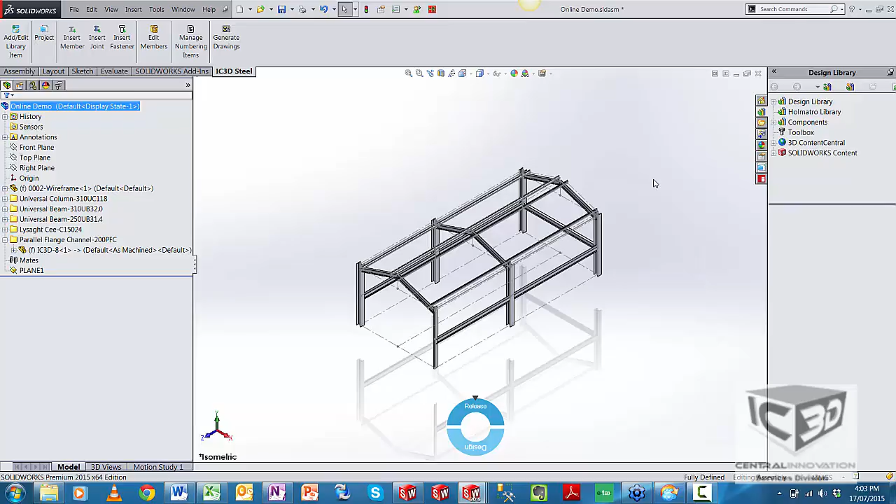Hi everyone, Prasad Bansule here from IC3D, wanting to give you a bit of an update on another new feature added to IC3D Steel, which is the inclusion of the Heavy Engineering and Research Association, or the HERA joints, which are quite widely used in New Zealand for the structural construction industry. So these structural connections are now available in IC3D Steel. So just wanting to show you a few examples of where they're available and then how they can be utilized.

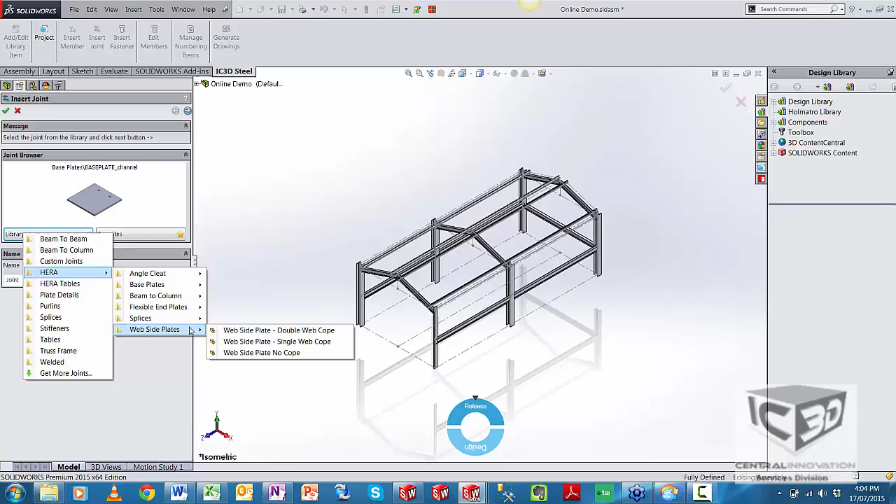So if we go over here to insert joint, under the library and getting more joints there, you'll see now, in addition to the Australian standard, we've got the HERA joints available as well for download. I've got them downloaded here, and you can see that they appear here under the library. And there's quite a few of them. There are angle cleats, base plates, some moment end plates and stiffeners, flexible end plates, lots of splices there, and some web plates as well. So I just want to show a few examples of the different ones that are available.

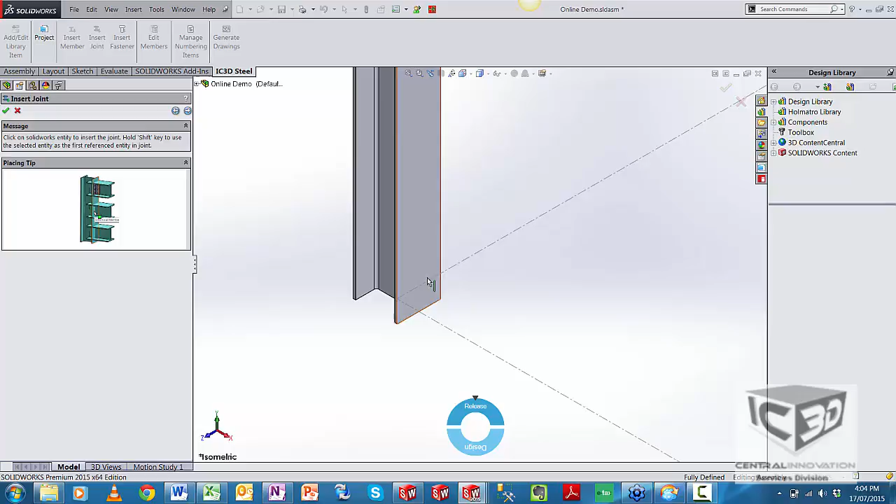We'll just start off with the simple base plate. You'll notice that there are different base plates for different structural member profiles as well. This is something that's defined in the HERA standard, so we've supported that as well. So I'll just choose a base plate here for this column. We'll just select it, click next. So it's asking for a reference point and just the column body itself.

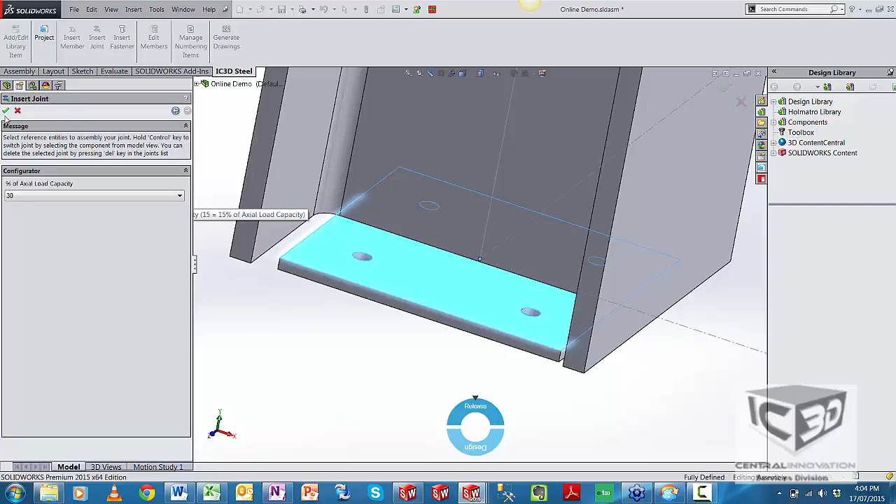Click next. So we've got an option here to select the percentage of axial load capacity. So each column can support some particular axial load, and we can, as the designer, choose a percentage of that, and the base plate will be sized appropriately. So a higher percentage means that it can support a higher load, and the base plate should therefore be a little bit wider and thicker, and so on. So if we just click OK there,

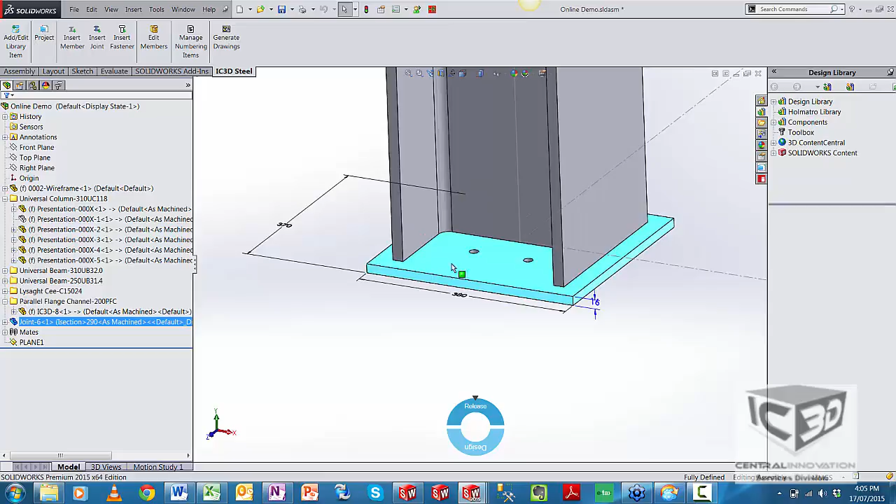and you can see that the base plate is resized. It's got its thickness there and it's positioned into place. As well as that, we've got the holes inserted there as well. And all of this sort of information is just coming from tables that are there in the background. And you can view the tables, you can edit them, you can basically change the values to whatever you like. So if you don't think that this is wide enough, or you want the holes to be spaced out a lot more, then you've got that option to go in, change those values, and the joints will be updated there as well.

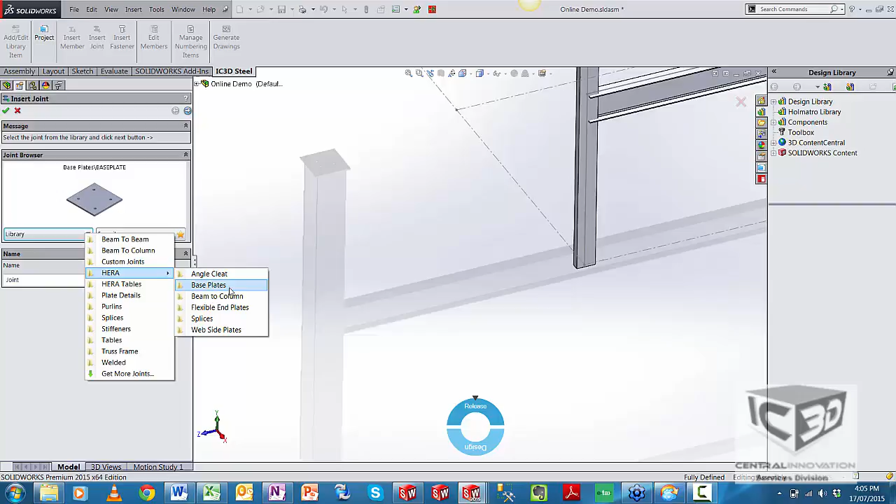Let's just take a look at another example, just a parallel flange channel there, so inserting a slightly different base plate design for that. So we'll just find that in the library. There it is there, one for a channel. Okay, again, just select where we would like it to go. So a couple of selections here. Again, it's asking us for the back face of the channel, and again we've just got these handy tips for you there as to what you need to select. So just select the back face of the channel, select the reference point.

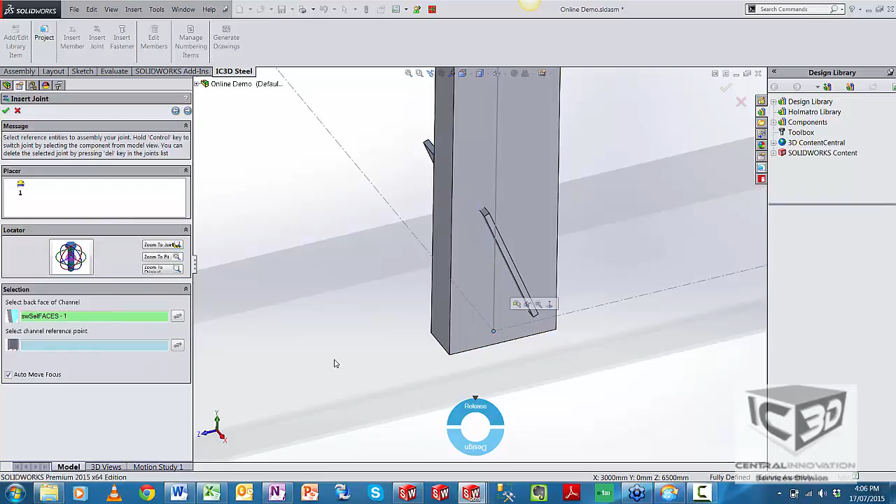Okay, so it's positioned itself there. Same thing again, choosing the axial load capacity, say 30%. Click OK and just do a quick rebuild to get it into place, and you can see how it sized itself and the holes are spaced there appropriately.

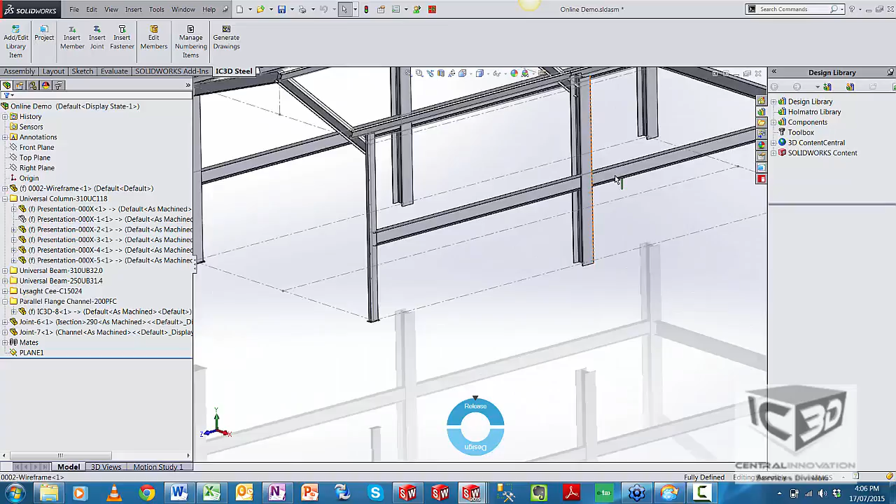Alright, a couple more examples there. Maybe we'll look at some angle cleats. So we'll just insert some here. So just go to a simple single with no cope. Again, we've got coping options there as well.

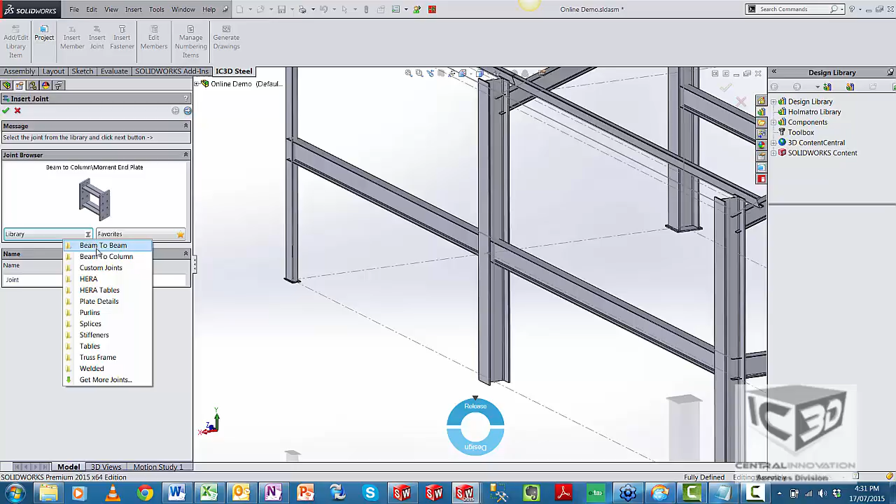Okay, let's take a look at another example. We'll just insert some angle cleats as well. So we'll just go over here, insert joint, find them in the library, angle cleat, and we'll just go with a simple no cope, for example.

So you can see here that, first of all, we've got double and single angle cleats, but we've also accounted for the different cope cases that are defined in the HERA standard as well. So I'll just go for a single no cope. Just go next, and we'll just go ahead and click where we want it to go.

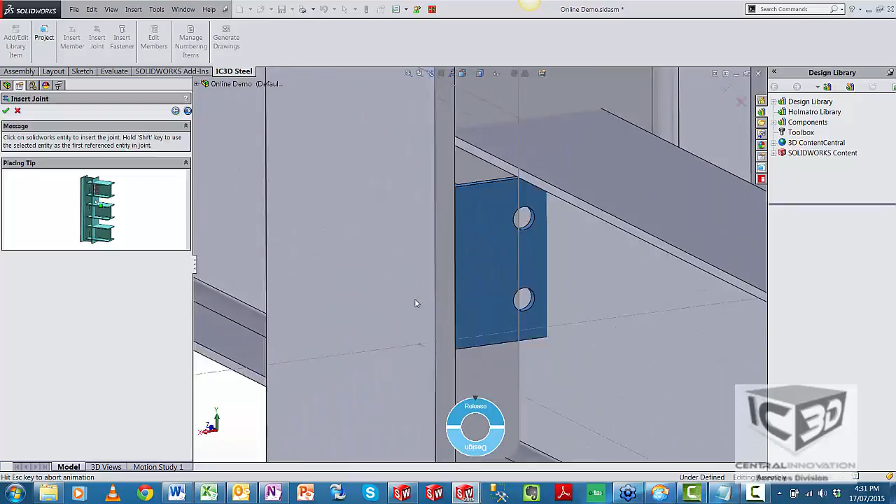Choose the options, so a few more selections here, 3 in all, so it's asking us for a column face, then the beam body, and then just the top face of the beam to define a vertical position. So define that. And this time we've got to select what percentage of shear load capacity. So what shear load and what percentage of that shear load can the supporting beam handle there. So we'll just go with, say, the default 30%. Click OK.

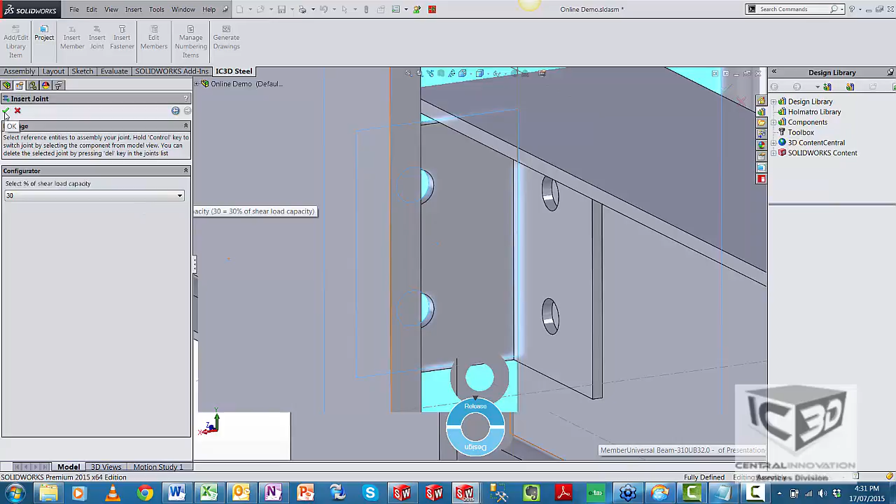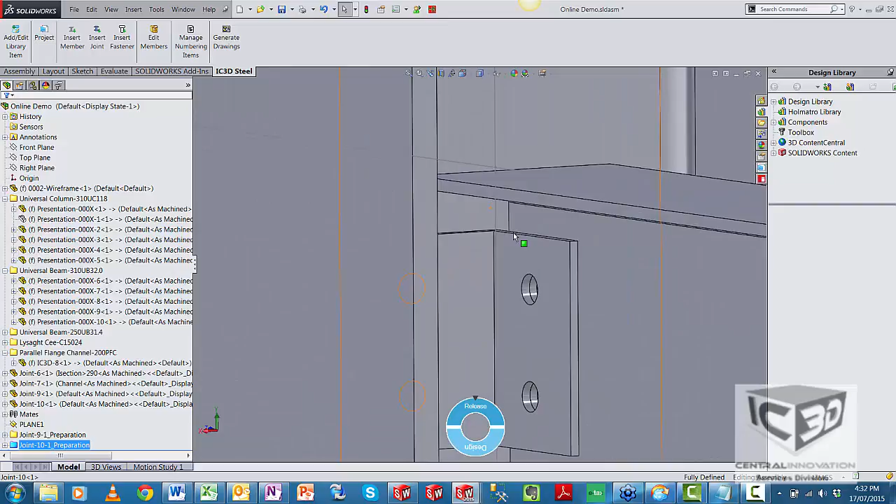And you can see how it's moved itself into place, and we've got the corresponding number of holes cut on both the beam and the column there. And not only that, you'll see that the beam itself is cut back from the column as it should be, again all defined by the standard.

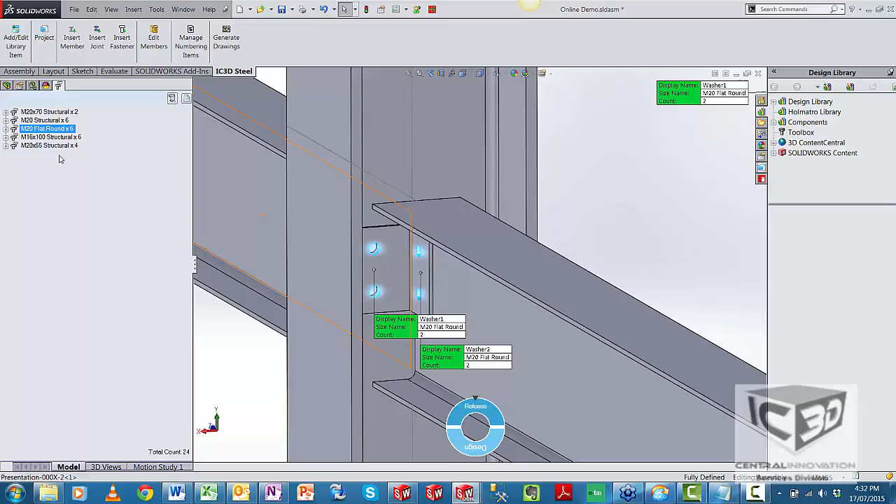And if we just again go to our Fasteners Explorer over here, so the angle cleat, it has not only the bolts, but it's also got some nuts, and it's got some washers there as well. And if we export our bolt list, we can very quickly take a look at what we've got there. So we've got some bolts, we've got some washers and some nuts that are being inserted there as well, and we could export that accurate bolt list out as well.

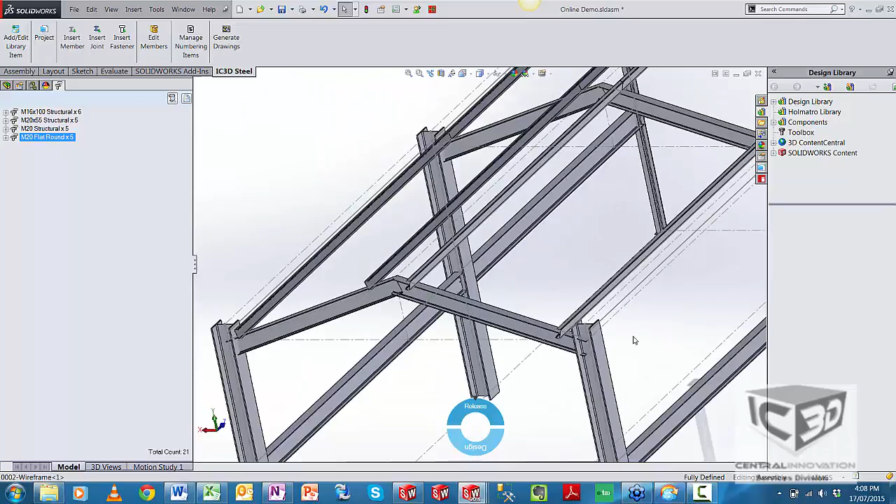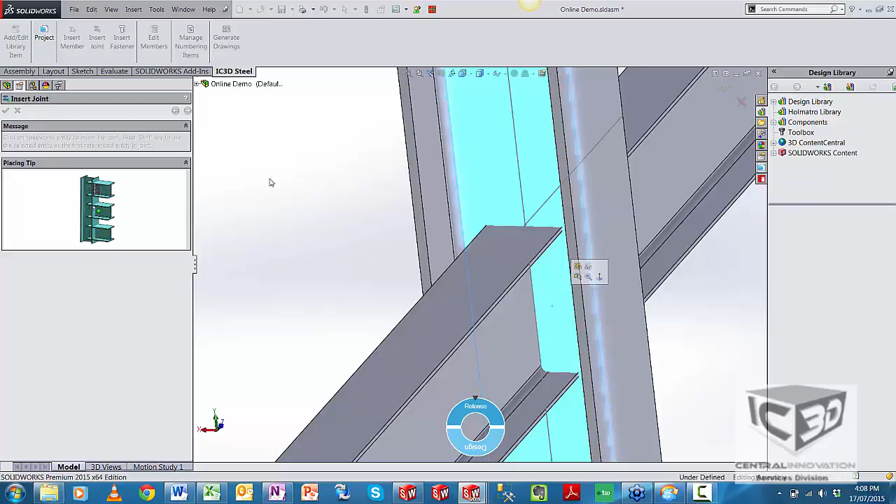A few more examples. Let's take a look at a flexible end plate. So again, we'll just go down to end plate there, and we'll just choose one with no cope. Select where we would like it to go. Choose the appropriate face, so that's where we need it to go. The beam body, and just the top face of the beam there as well. Okay, click next. Same sort of thing in terms of the shear load capacity. Let's just try 40.

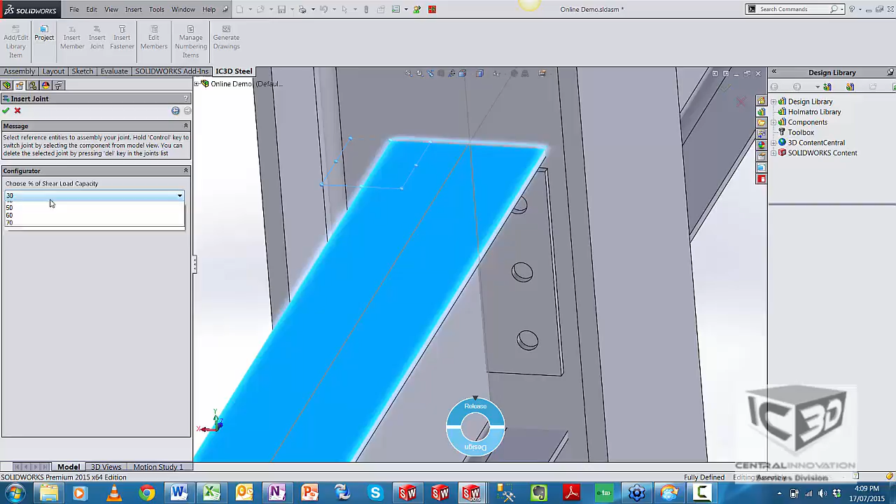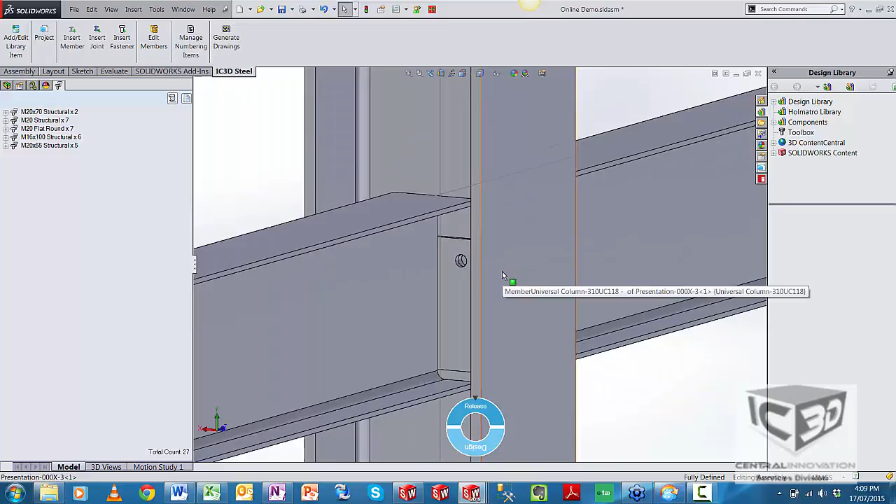And you can see that it's placed itself into position. You can see that the beam is cut back there. If I just hide the column for a moment, so you can see it's cut back there, and the holes have been cut through the column there as well.

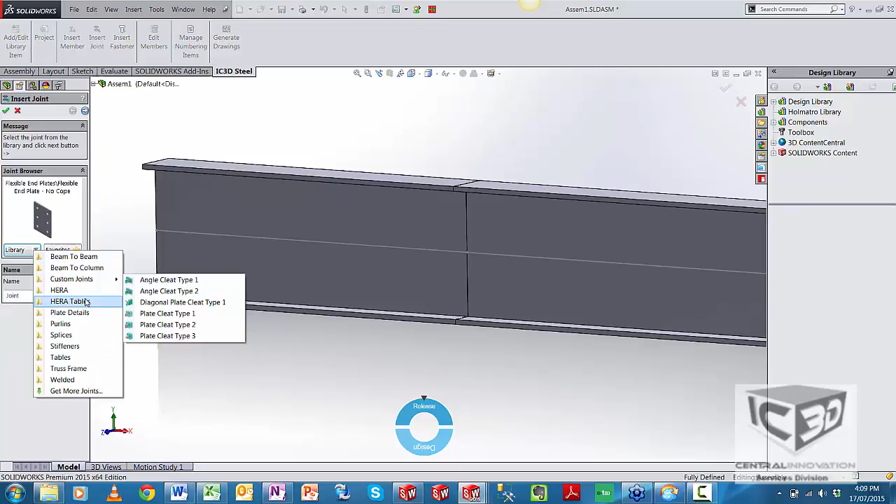Alright, let's take a look at a slightly more complex one. I'll just go to this assembly here. So when we've got two beams together, we might want to splice them apart. So we've got a few splices available in the HERA library as well. So a few different combinations. We've got beam splices, column splices, what's known as a bolted welded beam splice, and moment end plate splice that can come either extended or just flush to the beams, or even with gussets as well. So let's maybe try that one there.

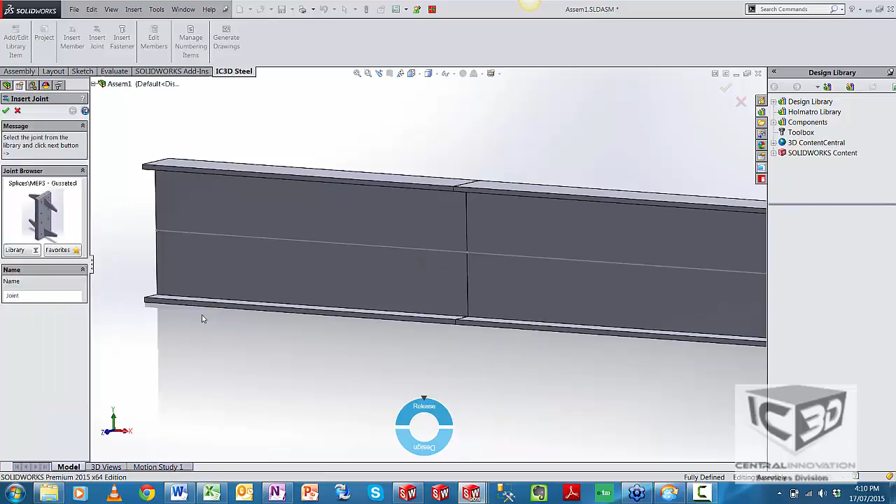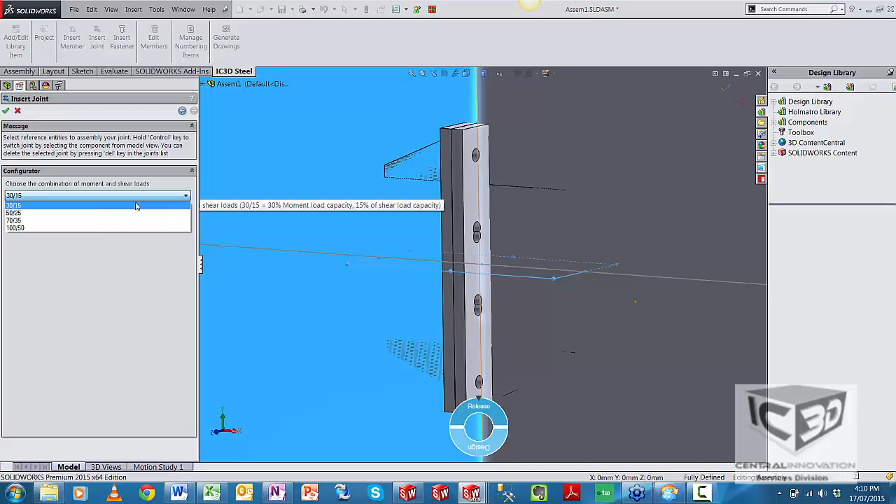Okay, so we'll just select where we would like it to go, and we've got a few selections to make there. So it's asking us for a beam body to align, and just select the beam body on the other side, and just a splice point to position itself along the two beams. Go ahead and select those. This time we have a combination of what are known as moment and shear loads. So you might have again just your percentage there, and there's a little tooltip telling you what you need to select. So we'll just select one of those options, click OK.

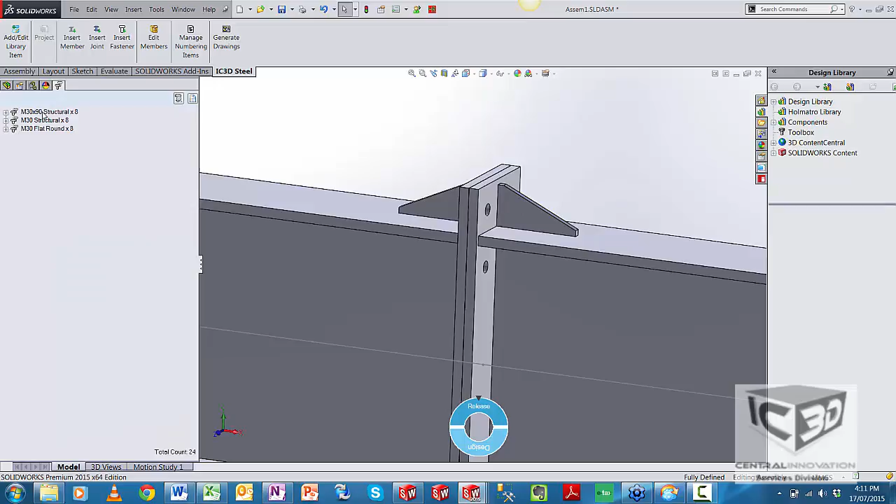And you'll see how it puts itself into place. So the plates are automatically widened, the holes are cut through, and the gussets are appropriately sized as well. And we can go again to the fasteners, and you can see we've got a total of 8 holes there. So we've got 8 bolts, 8 washers, and 8 nuts. And again, this can be completely customized to whatever fastener arrangements you might want.

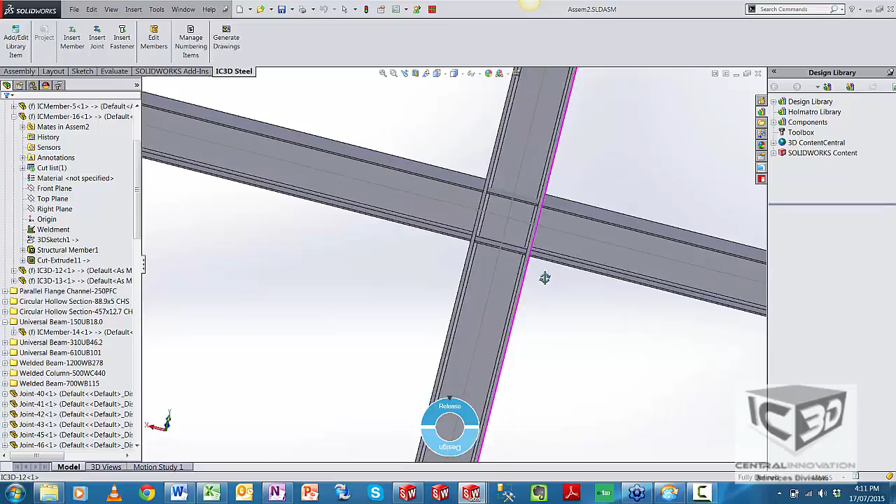Last couple of examples to take a look at. Just want to take a look at one, again a similar sort of moment end plate, but one that can actually add stiffeners as well. So you can see in this case we've got a column, and we've got a beam sort of going through there as well. So if we just go into our HERA library, and we'll just go into beam to column, and we'll just use the moment end plate.

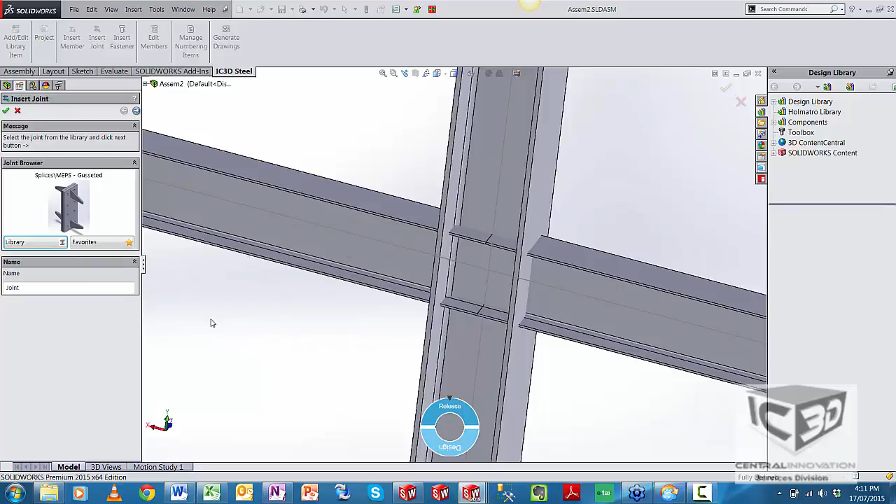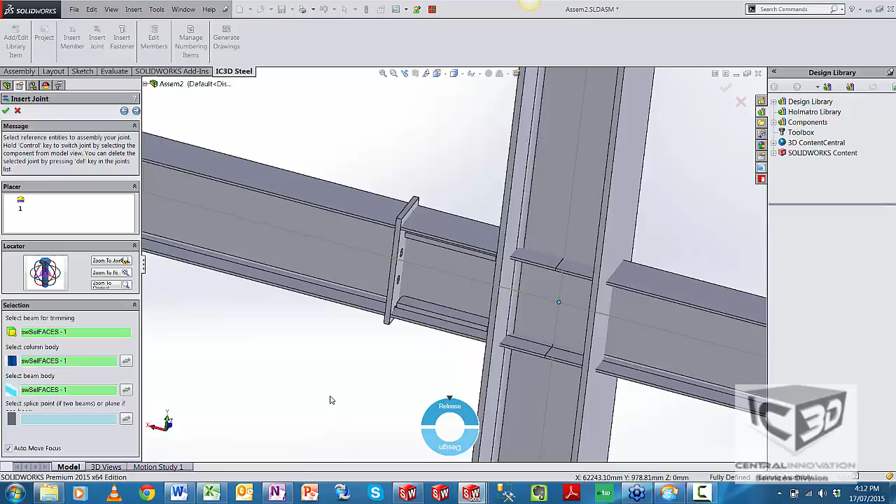Click next, choose where we would like it to go. Okay, so this has got a few sort of selections there, so we'll just select our beam, select the column body, select the beam on the opposite side, and finally just select our splice point. Alright, so it's into place there.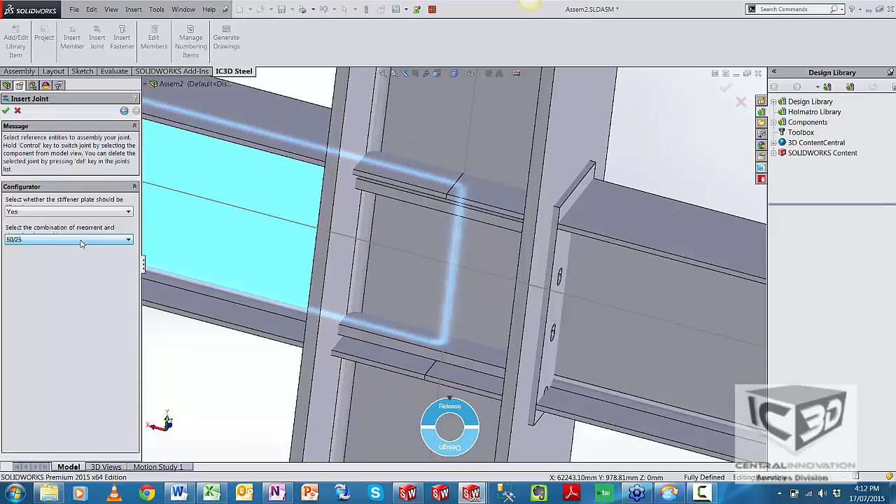Okay, so now this is a couple of options. So it's just asking us, well, do you want the stiffener plate to be filleted or not? The stiffener plates that appear in here. In this case, we should say yes, because you can see that the column has internal fillets as well, and just the combination of moment and shear loads as well. So we'll just go ahead and click OK. Now this is a fairly complex joint, so it'll just take a few seconds to sort of resize and insert itself.

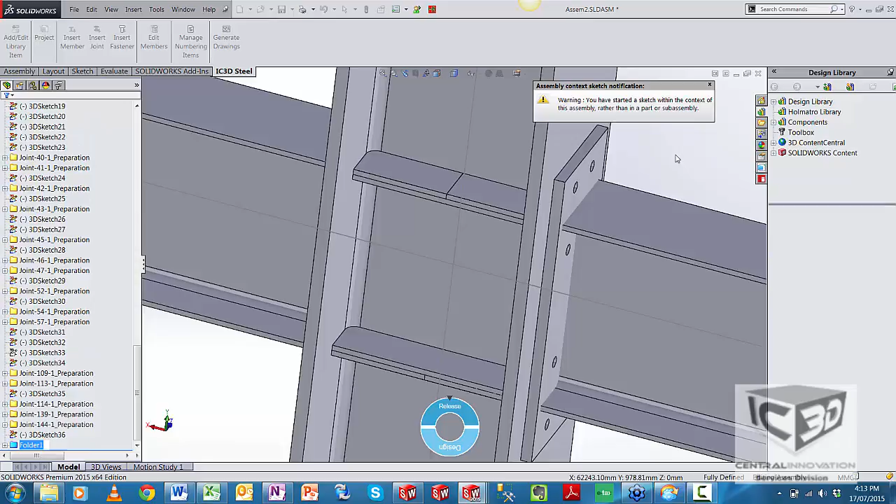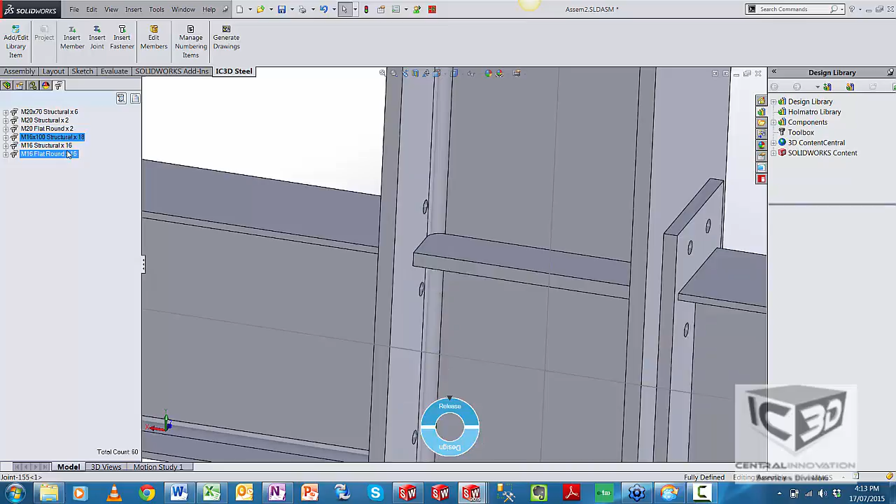Okay, and there we are. So you can see how it's inserted itself. We've got the hole sort of coming through there, and we've got the stiffener plates, and you can see that the fillets on the stiffener plates exactly match the corresponding internal radius on the column there as well. And if we take a look, we would be able to see the bolts and the nuts and so on and so forth that have been added along with this joint. So you can see quite a complex one there, but it's all inserted automatically for you with a few clicks. That would have taken me at least a few minutes to insert manually.

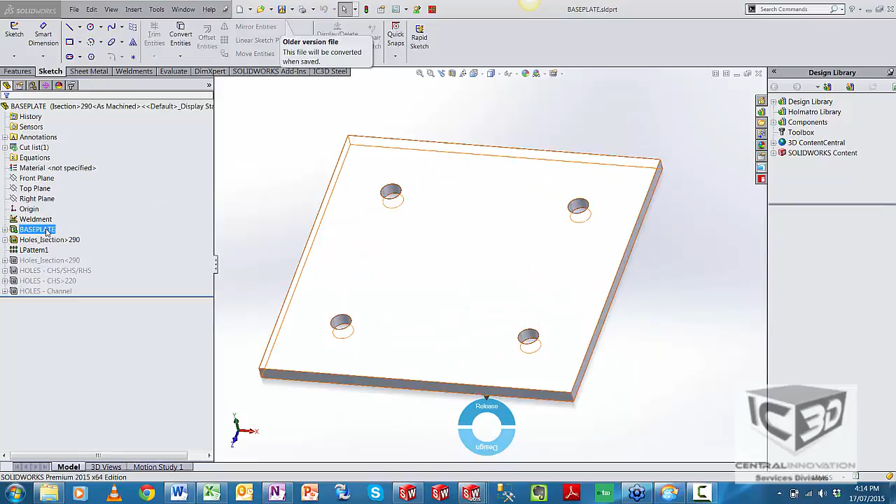Now, just in terms of the joints themselves and how they're configured, so as I said, they're based on tables. So just to show you a fairly simple example of that, I'll just open up one of the joints from the library itself. We'll just go with our favorite base plate. So just a simple model, and it's just been set up with the sketch for the base plate itself as well as the holes. And if we just go into IC3D Steel joint and define joint, this is the joint definition wizard that we use. And we've got a configurator.

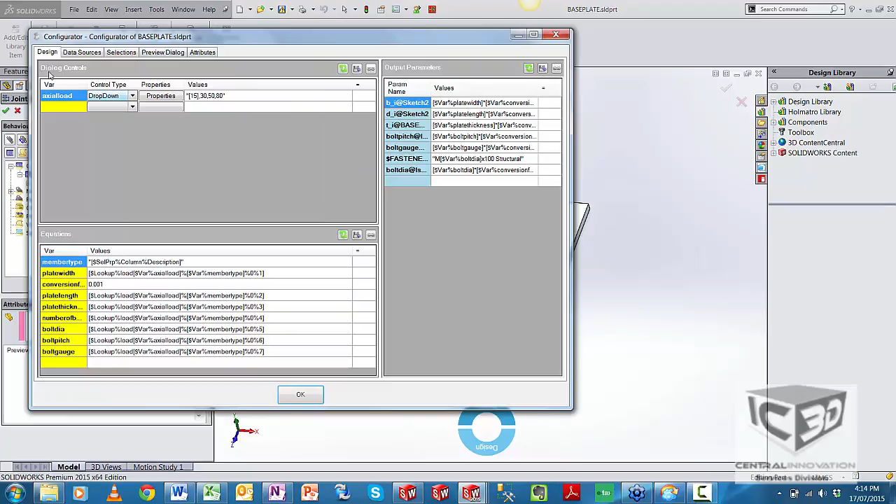So not to go into too much detail here, but as I said, all of this is just based on tables. So you can just see a table here for the different types of profiles that we use, and for each one we've got information on what the width is, the length is, the thickness, the number of bolts, the diameter, so on and so forth. So you can see for one of the columns that I used before, I think there was a 310 118. The width of the base plate would be 350, the length would be 360, the thickness would be 10 millimeters. The number of bolts is 4, and what the bolt diameter, the pitch, and the gauge is.

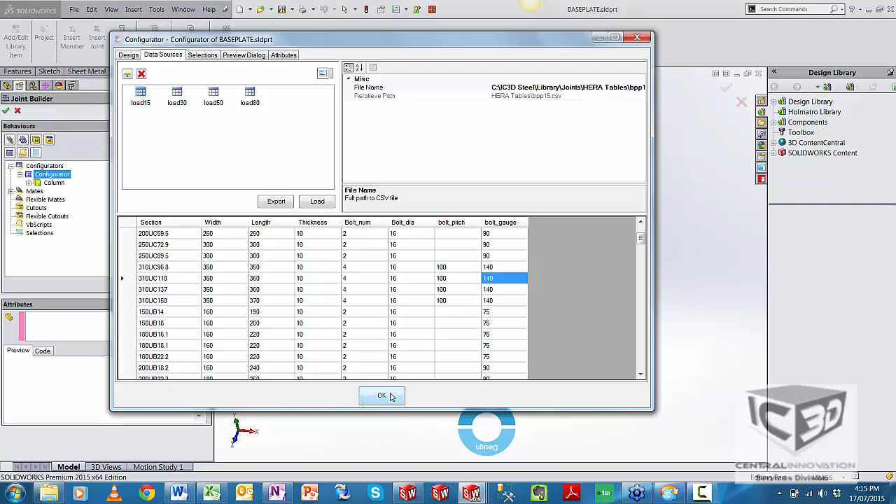And these are just the values that were taken directly from the HERA standard, but if you want to change those, you can go into the tables. They come along with the library, so you can open them up in Excel, just find the corresponding entries and modify those as well. So that's just what I wanted to show you there. The HERA joints are now available for download from the IC3D Steel library.